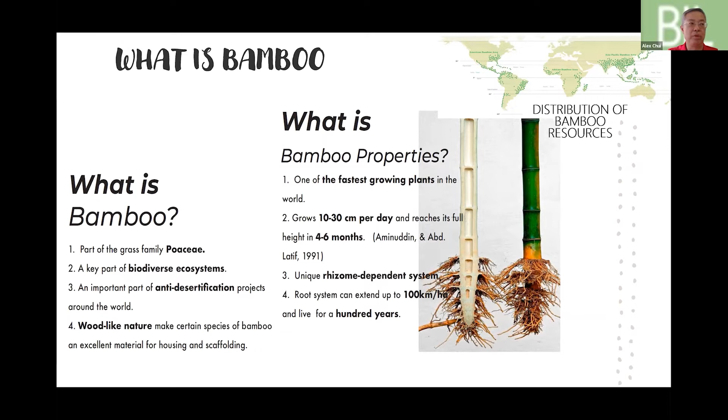Now, what are the benefits of bamboo? There are many benefits, but I think in today's modern world, one of the most important benefits of bamboo is ecological benefit. Growing bamboo doesn't require any intensive management and irrigation. Bamboo forests can release 35% more oxygen and absorb up to 5 times more carbon dioxide than trees. So naturally it's a very important element in the global carbon sink and climate balance.

One thing I have to point out is bamboo has a very strong and robust root system, and it will survive after harvest and grow afterwards. So there's no risk of soil erosion or deforestation in bamboo harvest.

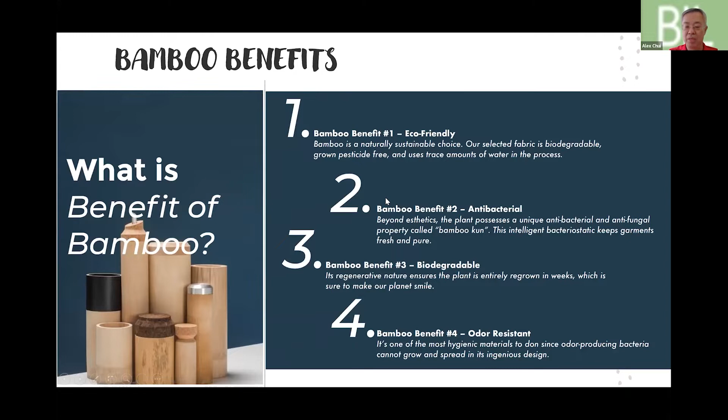Bamboo has been used in construction for a long time. Evidence suggests that bamboo construction first appeared in China about 4,000 years ago. Bamboo has very good tensile strength in the long direction. It has very unique characteristics - you can create very beautiful, unique architecture from natural bamboo poles.

But certainly it also has its limitations. It's difficult to codify natural material, which limits its application in industrial use. Also, the round shape of the bamboo pole imposes certain limitations on the architectural design that we can explore with bamboo poles.

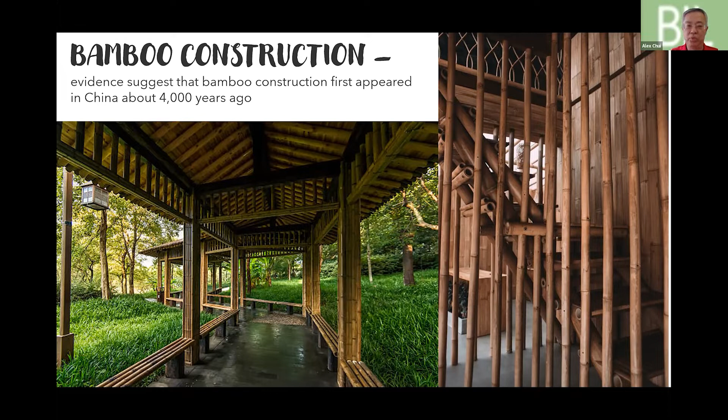In the past 3 decades, we started to have industrial products in bamboo, which we call engineered bamboo. The manufacturing process is quite simple: harvest the bamboo, cut it into individual bamboo slats, treat it for future use, and then form the bamboo into individual components.

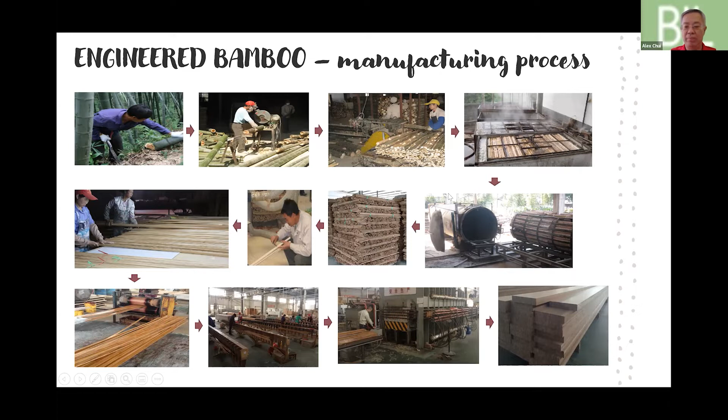When we look at the bottom right corner of the slide, which shows the basic components of all the engineering products that we'll see nowadays. Commonly there are two types of engineering bamboo: solid bamboo, a laminated product formed by individual slats glued together, and strand woven bamboo, which is crushed into bamboo fiber, then we apply quite a lot of glue and heat press it together.

Solid bamboo, when you look at it, is much greener, but in terms of strength it is weaker than strand woven. At the same time it's more flexible, and can mold and bend into a lot of different shapes and profiles. So in building applications, solid bamboo is more popular, but strand woven bamboo, when applied as a floor or decking in high traffic situations, is very hard and very robust.

If you compare engineering bamboo with wood, it's harder, it's stronger, and we try to create special design features using either wood or bamboo. Engineering bamboo can lead to much less wastage, as we can mold and bend bamboo into a lot of different shapes. Now, I said bamboo can be flexible and agile for architectural design. So what can it achieve?

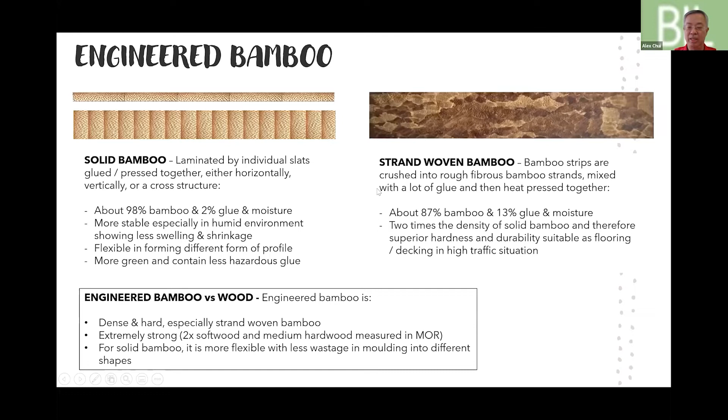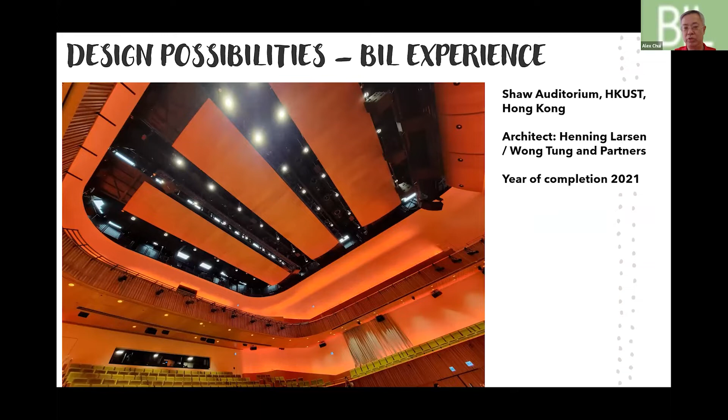Seeing is believing. Now I'm going to share some of the projects that we have done in the past. This is the Shaw Auditorium. I believe some of you guys have been to the auditorium in the AIA building tour in June.

The second one is the M+ Museum. We are doing all the mullions, ceilings, and walls.

And this is the Kowloon East Regional Police Headquarters in Kai Tak. One of the standout features in this project is the architectural fin in the ground floor lobby. It stands at 8.5 meters long without any visible joint in between. So it's a great piece of work that I think you guys can look at in the future.

And this is the Double Cove shopping center in Ma On Shan, Sha Tin. This is the only retail project in Hong Kong that has used bamboo on such an extensive scale. Year of completion is quite a long time ago, it's 2013.

Now I will turn to some outdoor experience that we have in China. The Chinese government is actively promoting bamboo, and they're more open to trying to apply bamboo in different sorts of applications, including structural bamboo. These two are not structural bamboo, but later I can show you pictures of our structural bamboo experience in China. These are two bamboo trellises in the tourist park in Chengdu.

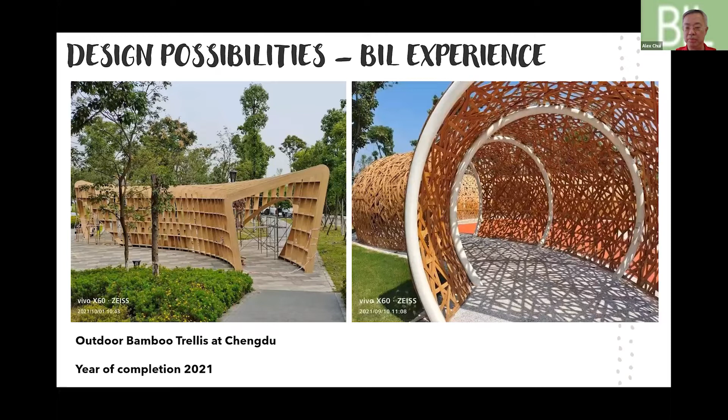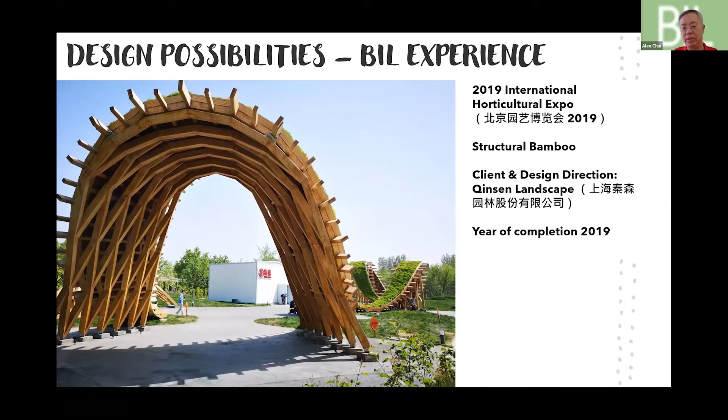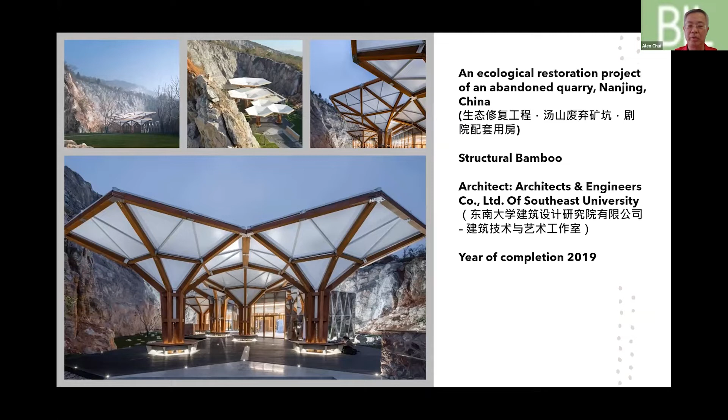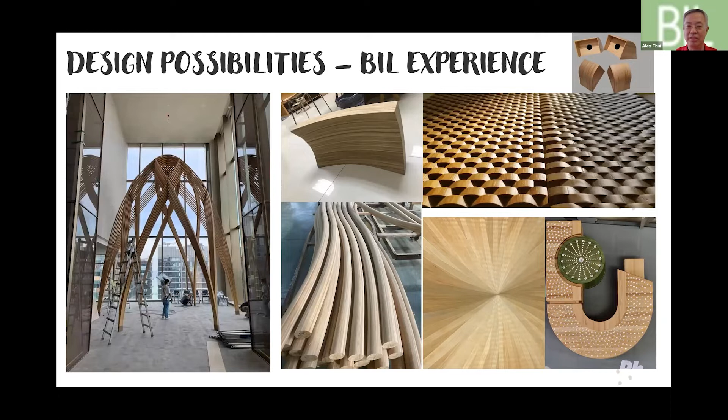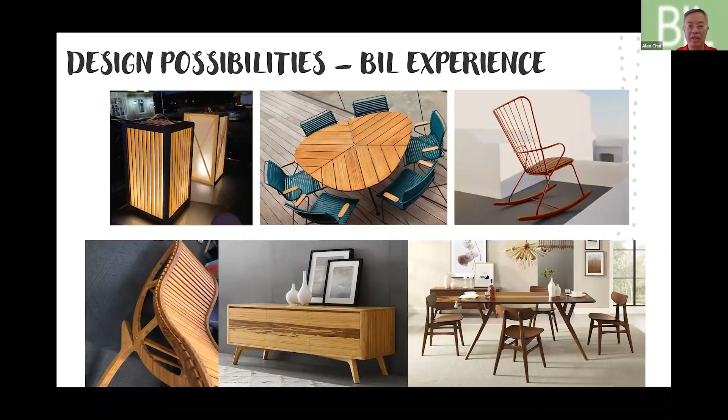Now, about bamboo promotion, the global promotion of bamboo: INBAR is an international intergovernmental agency formed under the UN Charter to promote bamboo. Besides green, I have to point out that bamboo economy is actually a social initiative. Bamboo and rattan grow locally in some of the most backward communities in the tropical and subtropical regions.

Since its founding in 1997, INBAR has been promoting the bamboo and rattan business in this region, and has successfully created jobs for about 250,000 people. So it's an amazing job done by them. And it's the same case actually in China.

Bamboo economy has been identified in China as one of the key initiatives to promote employment opportunities and income to local peasants. Beijing has set out a very ambitious goal: to use bamboo economy to alleviate up to or above 1 million people out from poverty. Where our factory is, in Jiangxi province, 150,000 jobs have been created in the past 10 or 15 years.

So bamboo, I see, is a green and social initiative that's important, one that I think we should all look at. And INBAR is also working closely with ISO to try to develop new standards to enable the application of bamboo on a bigger scale in different parts of the world.

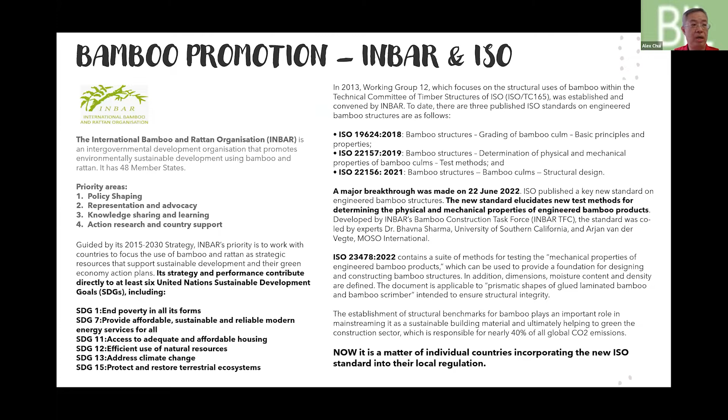Now, if you look at the physical strength between bamboo and wood, what we can achieve with laminated wood, we can actually achieve the same with laminated bamboo. The reason why we don't have bamboo buildings like this is purely regulatory.

Now, if you look at the ecological benefit of this building, based on the information released by the architects, this building alone - the saving in greenhouse gas is equivalent to removing 511 cars off the road in one year. So it's a pretty high, significant impact on the environment.

And INBAR and ISO are championing, trying to promote structural bamboo. I think one of the reasons is if we can create more buildings in bamboo, it can lead to a more significant carbon sink within all these buildings.

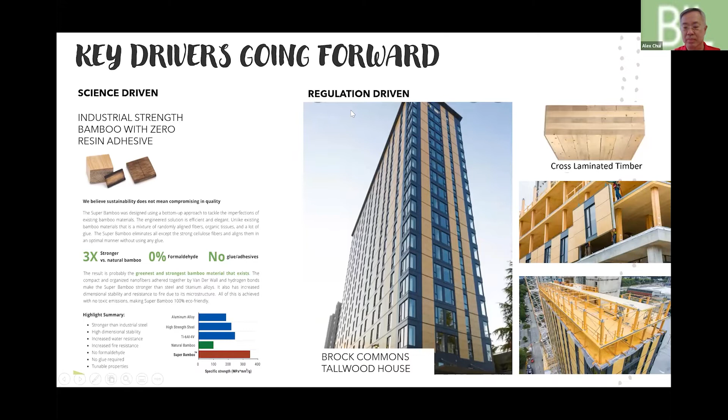So I think that's the end for my part. First, I will pass it to Dr. Dong.

Thank you, Alex. Before Dr. Dong starts, let me have a brief introduction about him. Dr. Dong is an environmental engineer, currently assistant professor at City University of Hong Kong. His interest is in life cycle assessments, carbon footprints, circular economy, and its application for urban sustainability. His research has been published widely, with over 120 publications. So let me pass that to Dr. Dong.

Okay, thanks for the introduction, Jackie, and it's my pleasure to join this great event today. I will share my PowerPoint now - okay, so I think you can see my PowerPoint and my voice is clear enough, right? Okay, thank you so much. I will discuss how we can assess the environmental impacts for bamboo products.

I will mainly introduce how we can apply an approach like life cycle assessment to calculate the whole life carbon emission, the embodied carbon emission in bamboo, to highlight its contribution to future carbon mitigation in our building sectors.

So here I want to highlight two big pictures from the energy and the material side. This is the total picture showing Hong Kong's condition on carbon emission. Here we can see the total carbon footprint in Hong Kong, and we can see the building sector actually accounts for most of the carbon emission. So it's significant for the building sector to think about how we can promote better ways to save energy and reduce embodied carbon emission to realize Hong Kong's target on carbon neutrality in the near future.

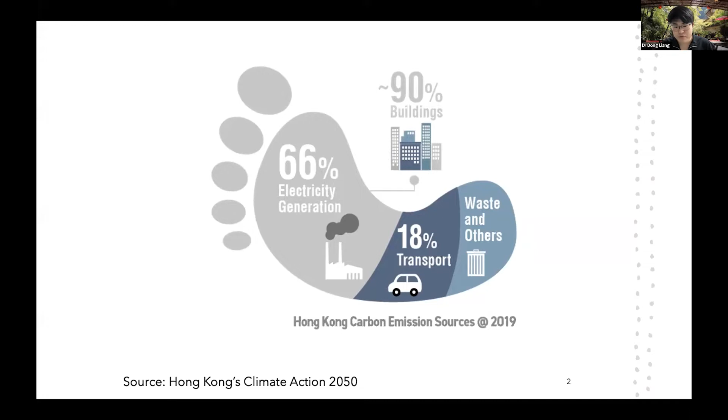And we also know that to produce these kinds of materials, we also have to consume a lot of energy, because the process of producing the materials is also very energy intensive. So how we can reduce carbon emission from the material side is also maybe some new attention we should pay in the near future to reduce the total carbon emission embodied in the building sector. So this is also a hotspot within academia recently.

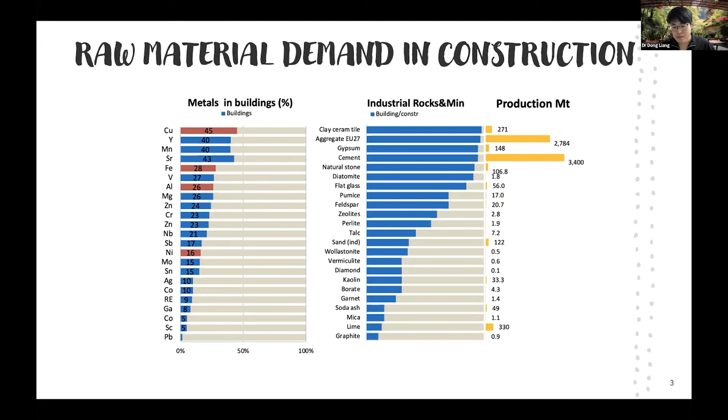We also have the demolition stage and how we can manage waste recycling for building materials. If we put carbon emission into the different life cycle stages, we can see there's much higher potential to reduce carbon emission. Now we pay much attention to the in-use stage, but it's also time to pay more attention to raw materials—how we can reduce carbon emission by using more renewable materials, which is a very important way to reduce total emissions in the building sector.

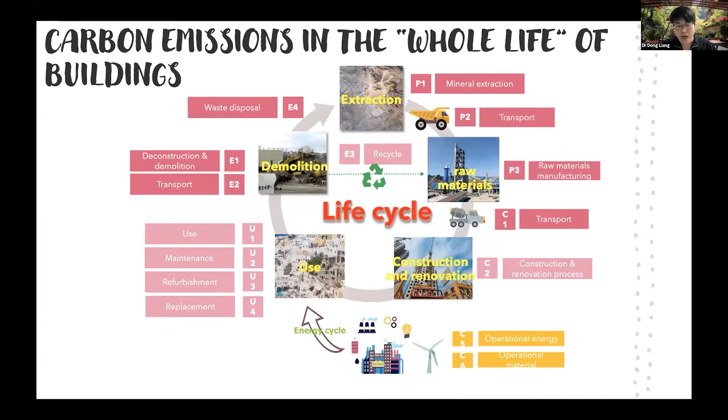So here we can see the benefit of renewable energy and also renewable materials.

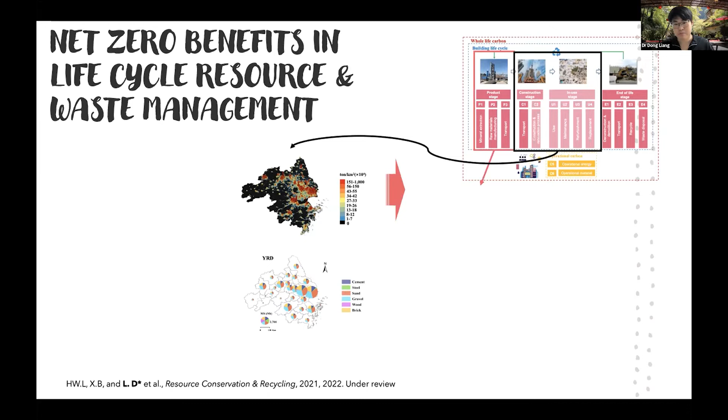Here is a case study we conducted in the Yangtze River Delta in China. We accounted for building material consumption across 36 cities in the Yangtze River Delta, like Shanghai, Nanjing, and Hangzhou. Apart from the bulk material amount consumed in all the buildings there, there's also a significant number to highlight regarding embodied carbon emission.

For example, the carbon emission from producing cement, steel, sand, and gravel. So if we pay much more attention to the material side of the life cycle in the building sector, it can offer a second round of space to realize carbon neutral scenarios in the near future, for example for Hong Kong and globally.

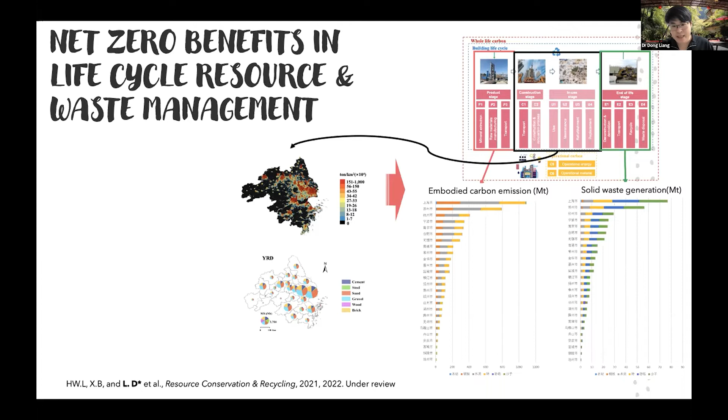Based on this idea, we can think about what kind of materials will be more beneficial to our environment and can help reduce carbon emissions. We have the idea to utilize more renewable resources because they can generate carbon benefits from the embodied carbon side, reducing the life cycle carbon emission for the building sector. If we apply more renewable materials, not just cement or steel, we can contribute more to carbon mitigation in the building sector.

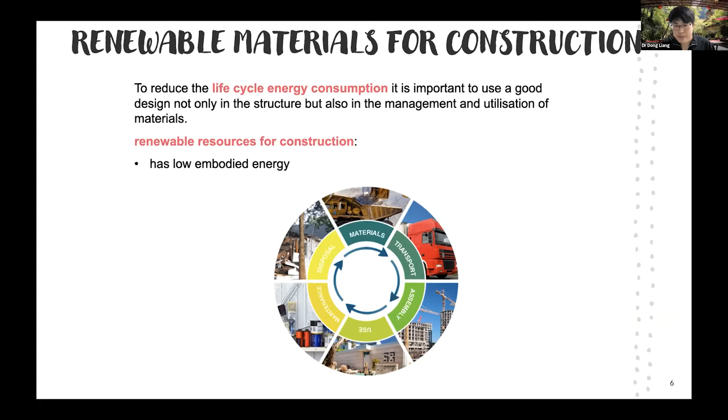This is the big picture and the ideas for this project. Based on this idea, we assess the life cycle carbon emission, also called embodied carbon emission, for engineered bamboo products.

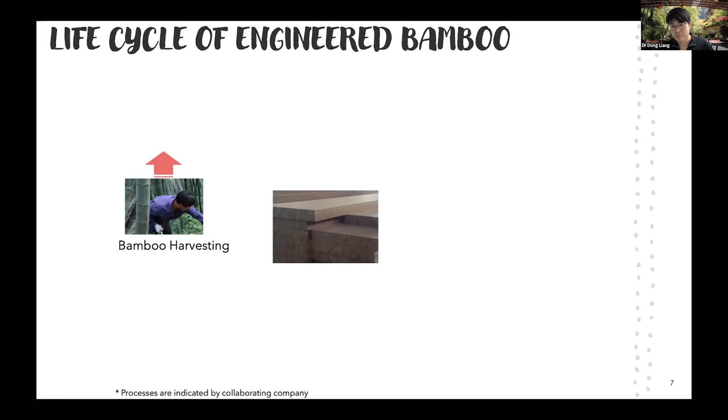Here is the very basic process to show the bamboo. We know this is the final engineered bamboo product, and to produce it, many processes are integrated into the whole life cycle. We have bamboo harvesting and transportation to the plant, then processing, like sawing of the raw materials, splitting of the bamboo culms, and rough shaving.

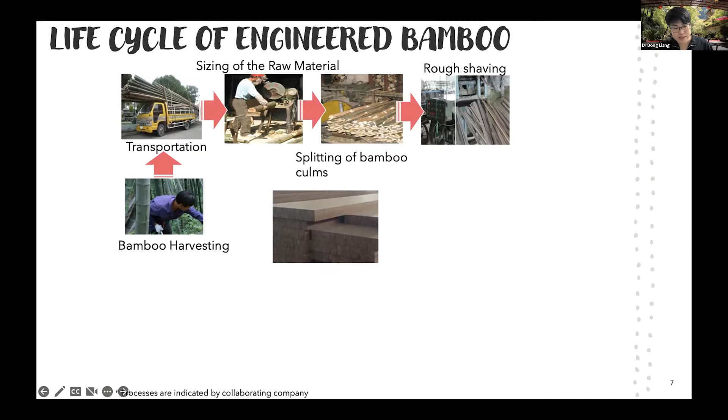Then some different processes follow—for example, fungal treatment, drying and moisture content control, precise shaving, color sorting, gluing, and assembly—and finally they become the final product which is shipped to Hong Kong.

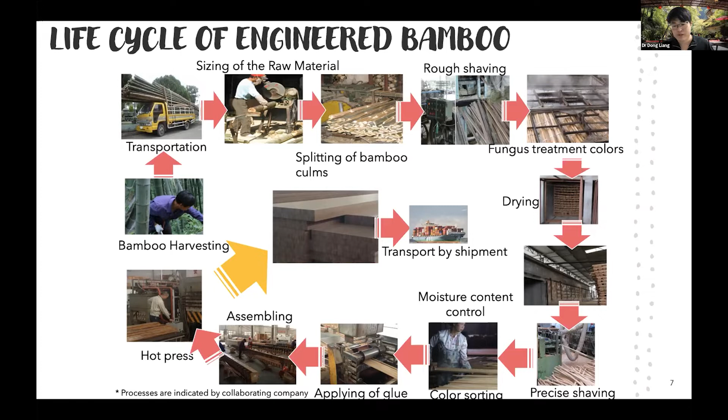We know transportation also consumes energy and material. So if we account for the total carbon emission for each process, we can show how much embodied carbon emission there is for the bamboo. This is the bigger picture of the bamboo manufacturing process.

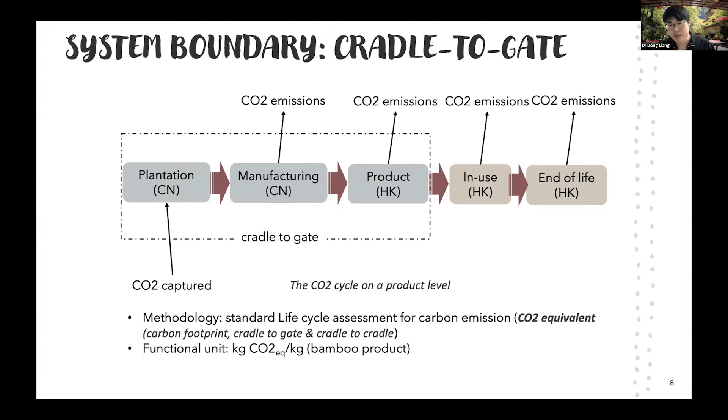We also applied life cycle thinking and assessment to account for the carbon emission embodied in the bamboo—a typical, standard life cycle assessment approach. We account from the plantation to the manufacturing to the products, and we also consider end-of-life scenarios to further account for the total life cycle carbon emission. We transform the data into per-unit values, like kilogram CO2 emission per kilogram of bamboo product. That is the methodology we applied to account for the whole life carbon emission.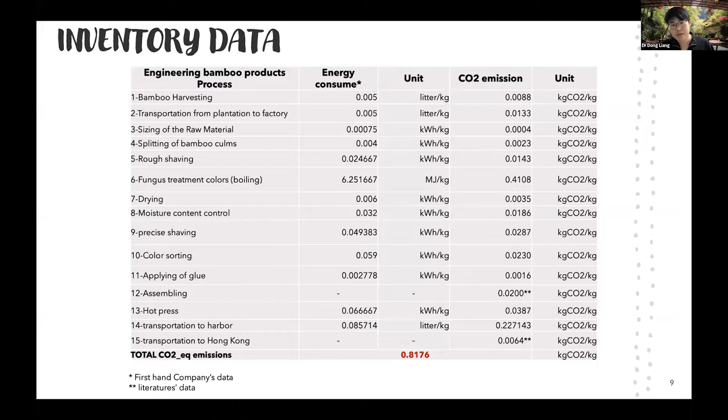But it is only from the cradle to gate. We also need to know bamboo in nature is a plant. So plant also, due to the photosynthesis effect, can absorb carbon emission in the process of growth. So bamboo also has the benefit of carbon sequestration. We will also think about this kind of benefit and results.

So this figure highlights the process-based carbon emission for the bamboo products, and we can see some processes can be potential to be future improved. For example, the much higher emission will come from the transportation, for example, from the mainland to Hong Kong due to the shipment.

And also some higher carbon emission is observed and accounted for the fungal treatment, and also something like the process shaving and also the hot press. They will use the steam and have very high internal energy consumption for this process.

So if we can use the data, we can also enlighten how we can further improve the different processes to try to reduce the process-based carbon emission to optimize the carbon emission for the bamboo product. This is also some figure we can see the numbers on this figure. This is the detailed carbon emission for each process on the bamboo.

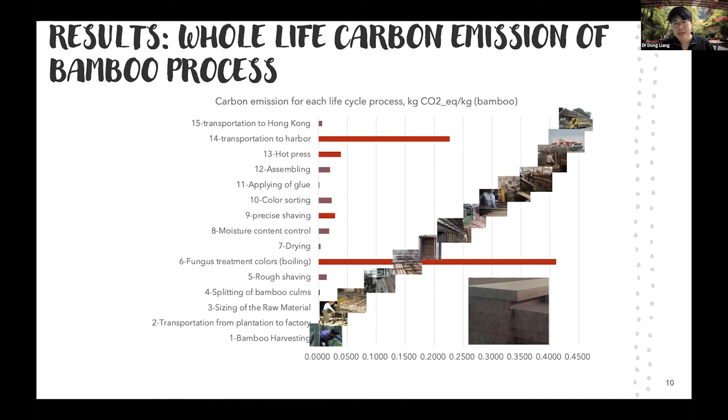And also, as I mentioned, bamboo is biomass and also a plant, so it has the benefit of carbon sequestration. So if we think about the carbon absorbed in the process of growth of the bamboo, we can further reduce the total life cycle carbon emissions.

For example, the data from the paper shows the bamboo growth in mainland China, like Fujian and Jiangsu province, the carbon sequestration benefit will be about minus 0.607 kilogram per kilogram bamboo.

And also the number will also change due to the end of life. For example, I applied the scenarios from European Union. 90% of the bamboo waste goes to power generation and only 10% will be landfilled. The benefit on the end of life will also further reduce the carbon emission by 0.7 kilograms. So that means we can also reduce the carbon emission by burning the bamboo to reduce fossil fuel consumption.

For power generation. So if we add the benefit on the carbon sequestration and also the benefit on the power generation from the bamboo waste, the total life cycle carbon emission for bamboo will be further reduced to, we can see the number is minus about 0.493 kilogram CO2 emission. That means bamboo is not only carbon neutral, but also actually tends to be carbon minus.

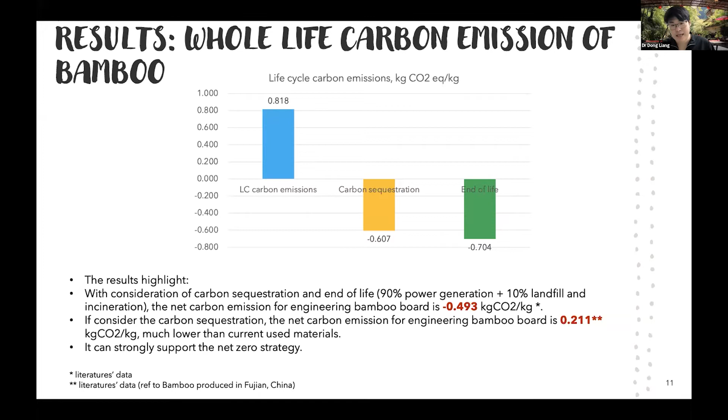So if we can apply more bamboo into our buildings due to its nature as carbon minus, we can contribute to net zero buildings in the near future. So that is something we can highlight based on the assessment on the life cycle carbon emission in bamboo.

And we further compare the bamboo carbon emission with other materials in buildings. For example, the number we can see here actually is still very high and intensive, and of course the high number on the carbon emission is about 2.38 kilogram CO2 emission per steel.

And also if we look into some other material, for example, that can potentially be substituted by bamboo, we can see wood is about 0.2 kilogram CO2 emission per kilogram of wood. So it's very close to bamboo without recycling.

So actually here we can see, of course, different materials have different functions. We can't use bamboo for all purposes, but if we can think about and utilize our inspiration, how we can improve the design, interiors or outside design on the buildings, maybe in the future there should be more potential to reduce the whole life carbon emission for our buildings by applying bamboo as a replacement, for example, some furniture or some decoration or some floor.

So that is the basic data we can see, and also we can use the data to support future policy making to expand our usage and application for bamboo-based products.

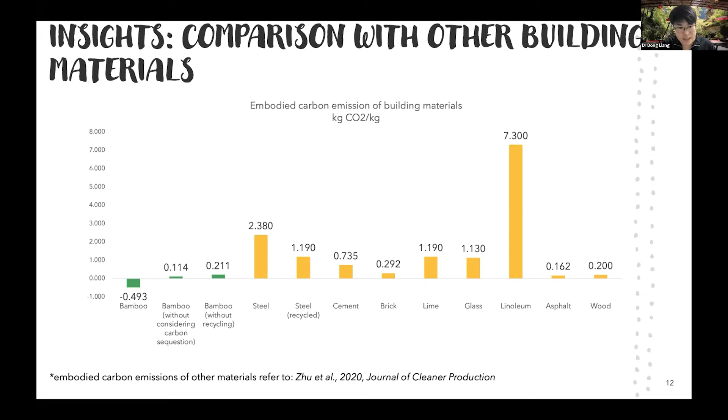Okay, so here actually based on the data, we have some general conclusions. We can see the industrial bamboo has significant potential to reduce the current whole life carbon emission for our buildings because in nature it is a renewable material. That means the benefit on the mitigation for whole life and life cycle carbon emission.

Therefore, bamboo could be substituted based on feasibility. So we need to open up imagination, and we need inspiration from designers and architects.

Some specific processes of bamboo also show relatively higher carbon emission, for example transportation, hot press, and fungus treatment. So we can think about future potential improvements, such as how we can utilize more renewable energy, promote hydrogen for shipment, achieve heat recovery at the plant, and use more efficient steam utilization.

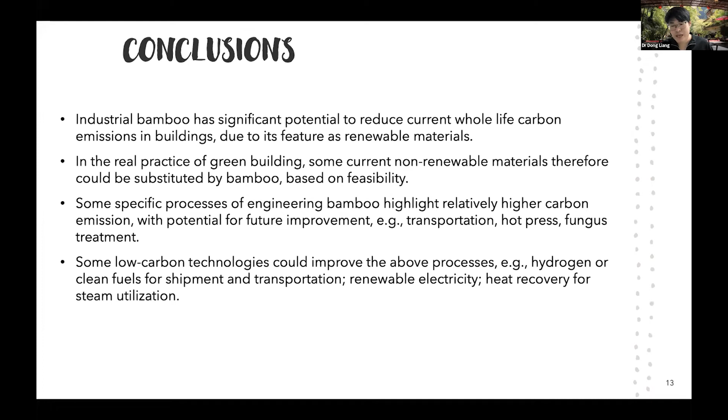We also think about future concerns. We started today by showing basically the CO2 emission, but in the future, based on life cycle assessment, we also want to assess other impacts and health impacts, for example air pollution. If we reduce fossil fuel, we can also reduce air pollutants. This is very important. Also, how about water pollutants and the risk to ecological systems, and impacts on human health, for example life expectancy and so on.

We also tend to make detailed scenario assessments to explore how to improve with current technologies in engineered bamboo. For example, how we can apply cleaner fuels, how we can apply heat recovery, and how we can apply low impact glue in the process to reduce other environmental impacts.

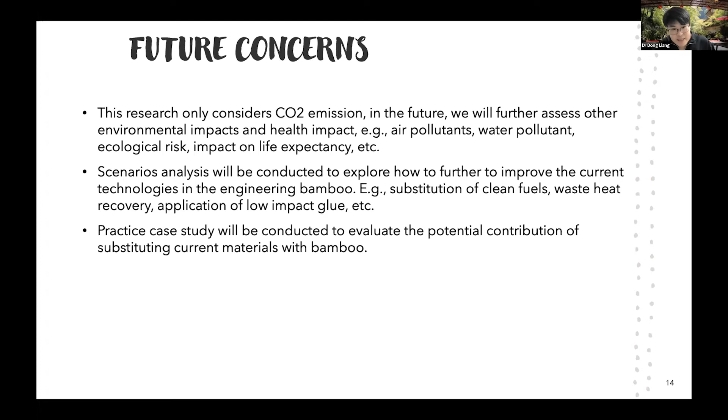Finally, I think a practical case study will be very important to realize our ideas in the real world. So we intend to utilize the unit value for bamboo to evaluate how a whole building can reduce carbon emissions if bamboo is used in proper places, for example furniture and decoration. This is our next plan, to show a real case highlighting how we can practice bamboo ideas in the real world to support carbon mitigation and neutrality scenarios in Hong Kong in the near future.

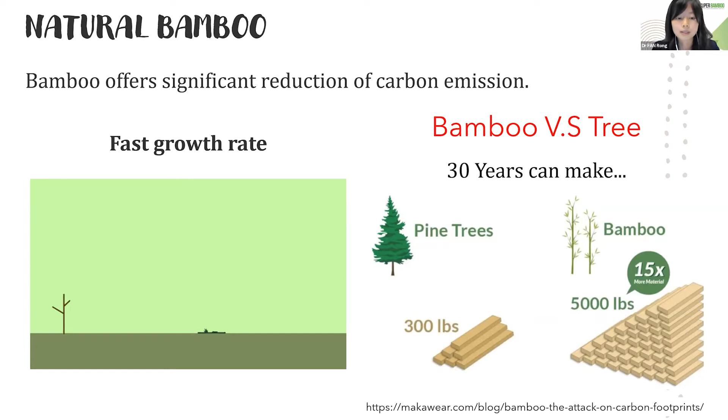From Dr. Dong's introduction we already know that bamboo could offer significant reduction of carbon emission. One more thing, mentioned by Alex at the beginning, is that bamboo is one of the fastest growing materials and one of the highest yielding natural cellular materials. It can reach maturity within months and ultimate mechanical properties within a few years. So when you plant a bamboo tree and also plant pine trees together and wait 30 years, you can produce roughly 300 pounds of pine trees, but you can have 5,000 pounds of bamboo, which means more than 15 times the amount of building material if you use bamboo. So bamboo has very good potential.

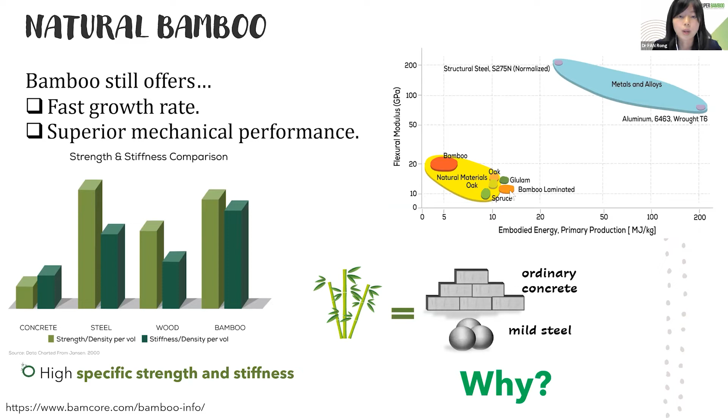So why does it have such a phenomenon? Why does it have such mechanical properties in terms of the things we're showing here? To answer that question, especially for material scientists, we usually find the answers through the microstructures.

When we talk about the microstructures or the whole structure of the bamboo, the first one is the regular bamboo structure that you already know. It contains the hollow culm and also the solid node.

But when we cut it off and look at the cross-section area, we find it is not uniform anymore. It contains, we could say, a monkey face, because it contains some dark parts and also some white parts.

When we zoom in again to the microstructure level, down to the nanostructure level, we can find each level contains different structures inside, such as when we go to nanostructures, it also contains thousands of microfibrils inside. So this means the total structure is the hierarchical structure of bamboo.

In today's topic, we will not include the nano part. We will focus more on the microstructure level, because sometimes we can see it just with our eyes, without needing any other tools.

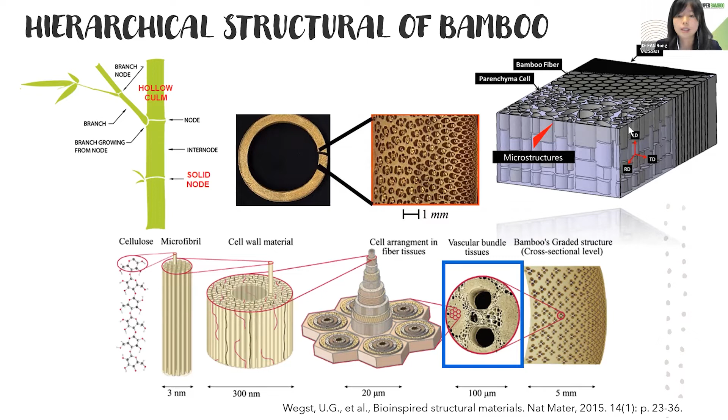We also drew a schematic picture here showing the typical structures, the microstructures inside the bamboo. This page will give you more information about it. So for the bamboo, it usually contains a hierarchical structure like this.

We show two different directions: this is the transverse direction, and this is the longitudinal direction. We can see the scale here is around 1 millimeter, visible by our eyes in this area, and here it's around 400 microns down to 20 microns.

From the large image to the smaller image, we can see it contains different microstructures inside. Taking this one as an example, the bamboo contains some vessels here.

Vessels transport water and nutrients, and they are all surrounded by fibers. In terms of volume fraction, the fibers and the cellular parenchyma cells, like this one - this is the parenchyma cell - form the majority of the bamboo culm.

So these two parts, the bamboo fibers and the parenchyma cells, contribute more in terms of the mechanical performance.

We can take Moso bamboo, the most popular bamboo, as an example. We can see it contains around 57% parenchyma cells and also around 37% bamboo fibers.

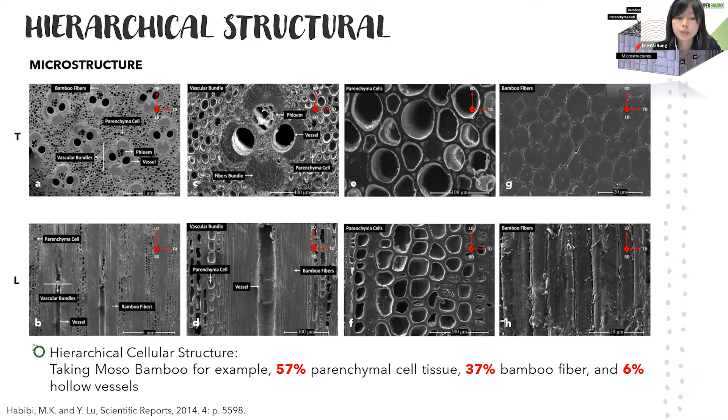Once we know the microstructures, we will do some mechanical testing to test the mechanical behavior of it. Today I will show three typical examples of mechanical testing.

The first one is tensile and compression. We will pick up the bamboo from the bamboo culm along the transverse direction, and then do the tensile test and the compression test.

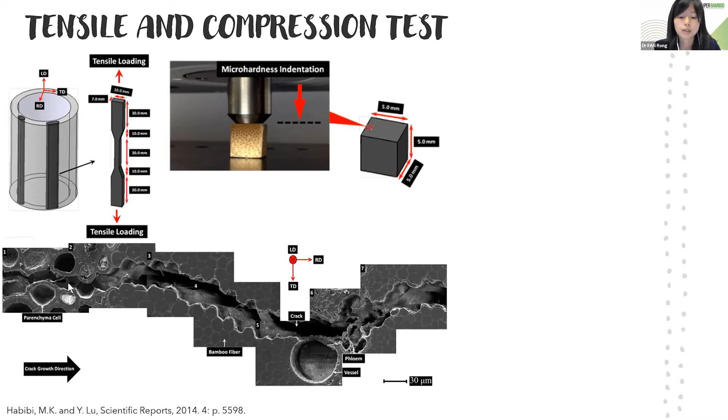Today I will show some microstructures of it. Once the initial crack reaches the critical condition for further crack growth, it will propagate along the parenchyma cell boundaries - we can see here, this is the parenchyma cell.

It will usually crack along the boundaries until it reaches the fibers. But we can also see it will crack through the interfacial surface of the bamboo fiber, like here, until it reaches the vessels, because the vessel is more like a hollow. This means the material here will be blocked and then find another way to continue cracking.

So the crack is important, because especially for construction, crack is not good. We want to prevent the crack - just like if we have a glass, we know glass is very brittle. If you have a very small crack, the glass will be fragile.

But for bamboo, because it has so many interlocks, the microstructure of bamboo will prevent crack propagation and give you more toughness.

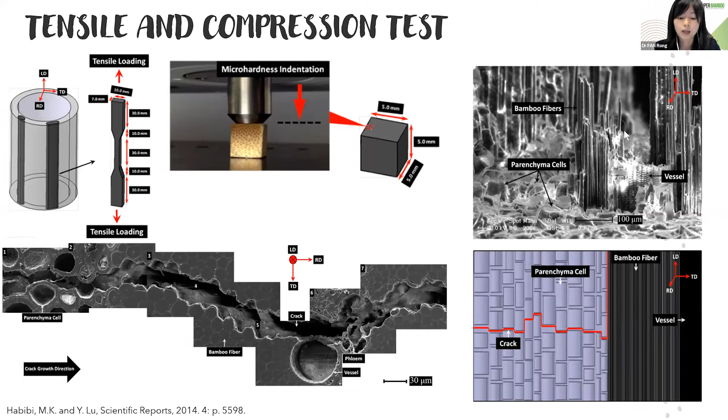This is a picture showing the fracture surface of tensile bamboo. We can see that the bamboo fibers were pulled out. This is the most prominent feature in the tensile fracture surface, which could simply be created to exhibit crack growth along the fibrous interfacial areas in both radial and longitudinal directions.

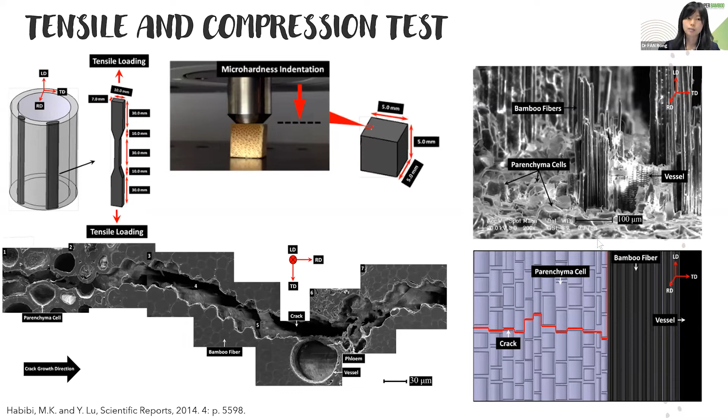We also did some bending tests, because we know that fibers and parenchyma cells have a very important role in mechanical performance. So we chose different samples containing different parts: parenchyma cells, the white ones, and fibers, the black ones, to do mechanical testing and check how they affect the total mechanical behavior.

When we compare model A, which has more fibers on the top area, and model B, which has less fibers on the top area, we do a 3-point bending test. The bottom part is fixed, and the loading goes through the top part in the middle of the sample.

This is the typical mechanical testing process for any material. Model B is the test loading on the lower fiber, compared to model A. This is the stress-strain curve, where stress is related to the load and strain is related to the displacement.

We can see that the stress-strain curve in the first stage is not linear. It's a nonlinear deformation here, especially before the fracture point. This is associated with the squeezing of the parenchyma cells, because we already know the parenchyma cells are more like a capsule shape. This area contains more space, so it gives more space for compression, compared to model A, which does not have this phenomenon.

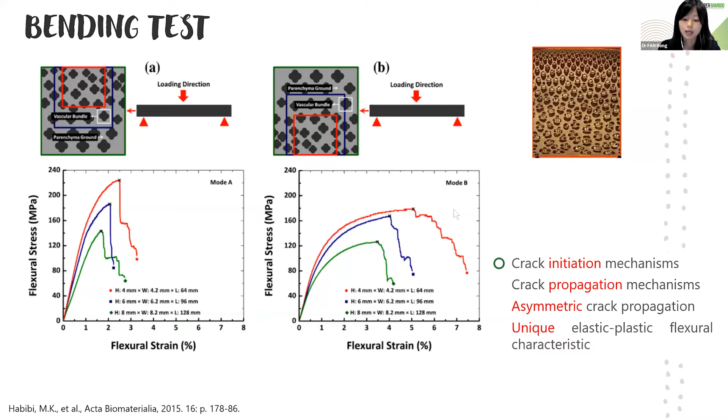For model B, the fracture mode is more like fibers pulling out, named as delamination. But both models show some squeezing of the parenchyma cells on the top side, which is quite important for such a material, giving more fracture strength, meaning it can deform more. That is the typical fracture mechanism of natural bamboo.

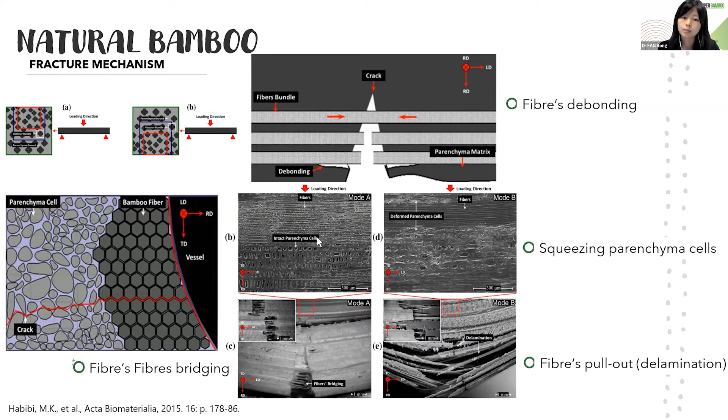We already know that bamboo fibers and parenchyma cells are both very important, but how do they affect the total structure, or how can we get them and test it? So we found another way to isolate all of the parenchyma cells and fibers.

There are two different magnifications. This one, the scale bar is around 100 microns, more like the dimension of your hair. This is the fibers. We can say the fiber is more like solid, but the parenchyma cells are more like a capsule shape, which gives larger space for compression, while the fibers provide more strength.

Some researchers also studied the tensile strength of these fibers and found that the maximum tensile strength can reach around 2.2 gigapascals, which is quite high. But compared to the known tensile strength of bamboo, around 100 megapascals, this means there is a larger space for us to improve natural bamboo.

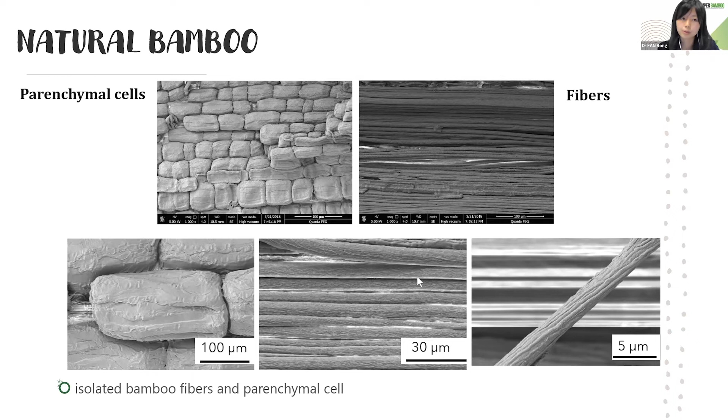Other than that, I want to show the current bamboo materials. Alex already showed some results on this part, so I will just skip it.

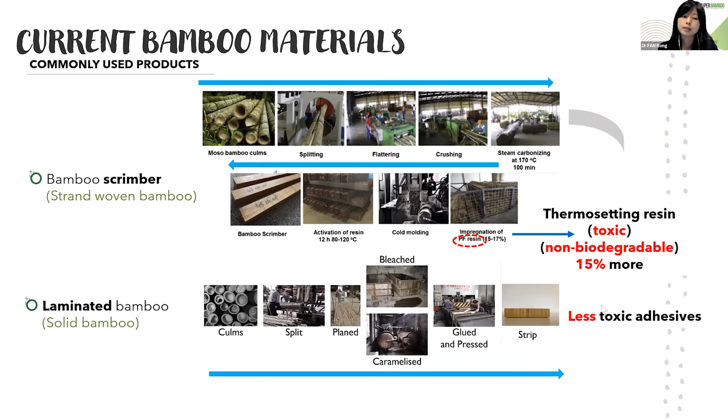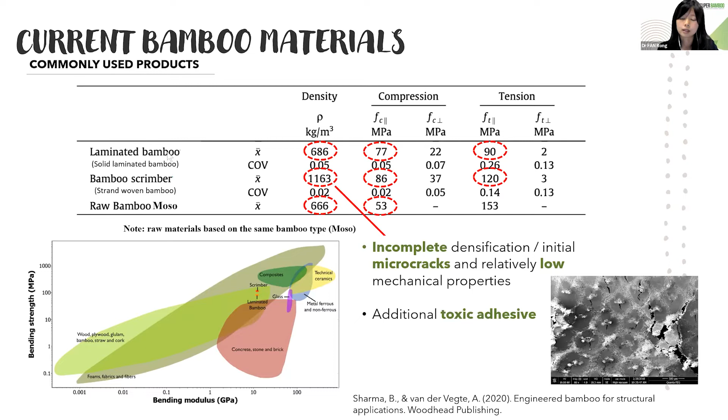My point is that current materials contain a lot of toxic adhesive, and the material inside has some initial cracks, which is not good for mechanical properties. That is why when we check the compression and tensile strength of existing bamboo products, it is not good. So our process uses a very simple two-step process to get the super bamboo.

The first part is that we'll do the chemical treatment to remove the lignin and the hemicellulose inside, to make sure that the bamboo fibers and the parenchyma cells introduced today can be easily moved, which means all of them can be fully compressed. That is the most important part we need to do.

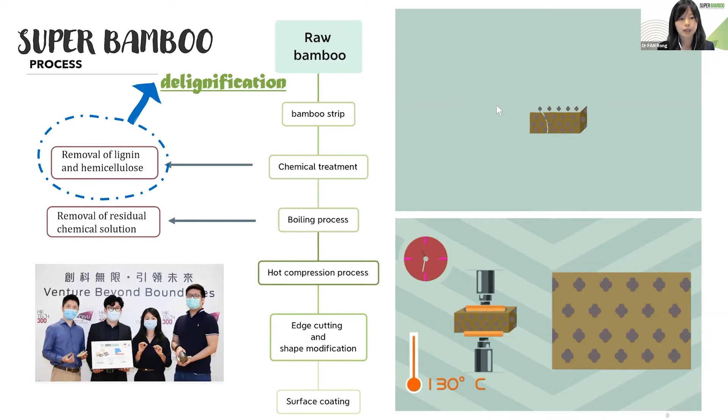Another thing is that we'll just use the bamboo material itself to glue them together, which means we didn't use any additional glue, especially any toxic glue, for our super bamboo samples.

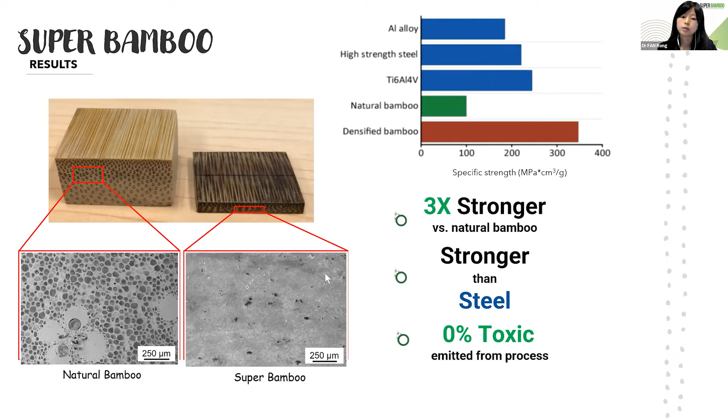So this shows you the example of the microstructure. We can see that this one contains a lot of hollow space, but this one is fully densified, which is why this material can give you more than 3 times the strength of natural bamboo. And also this is 100% green materials.

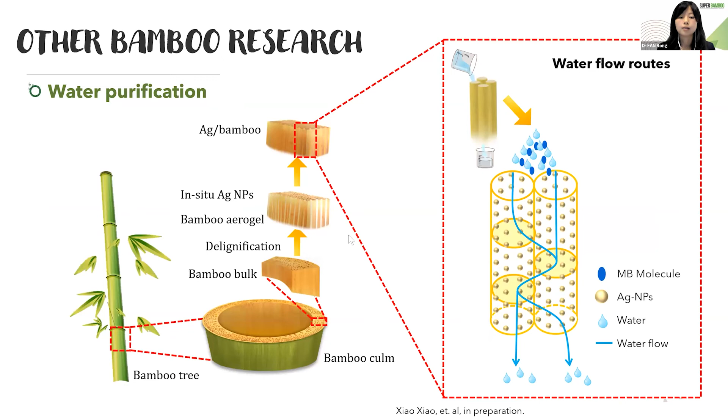This is from 2 other researchers. I will just skip it because my time is up. And yeah, I think that is all I want to share today. Thank you for listening.

Thank you, Dr. Kong, for extremely vigorous research on bamboo down to its microscopic level. You actually reminded us that bamboo, although a very sustainable material, if we can eliminate glue, would be a breakthrough and make it even more sustainable.

And so I understand you and Mr. Ong founded a startup, Super Bamboo, basically bringing the research out of the lab into application level, so that for us architects can maybe one day see this product in the market.

So next we have Mr. Ong. He's one of the co-founders of startup Super Bamboo, also a mechanical engineer, and one of the achievements was last year: you started the startup Super Bamboo and raised over 2 million Hong Kong dollars to further the research on bamboo material.

So I will pass the floor to Mr. Ong. Okay, thanks Jackie again for your introduction.

Yeah, hi everyone, I'm Andy. It's my pleasure to be here as the last speaker for the last section of this webinar. After my part, I will pass the mic back to Alex for a quick recap, followed by a Q&A session. But now, what I would like to share in my short time is really how there's an opportunity to

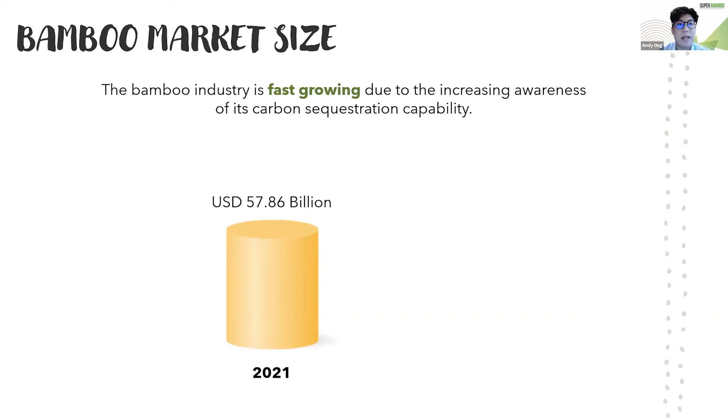Now to start, earlier Alex showed everyone some pictures of wonderful projects made out of bamboo. But let's take a step back and glance at the global market size of the bamboo industry. So in 2021, the global market value of bamboo stood at around 58 billion US dollars, and it is forecasted to reach around 83 billion US dollars by 2028.

Now, of course, besides engineered bamboo, this number covers other types of bamboo products as well. But the takeaway is that there's already a sizable industry for bamboo, and we expect it to grow even faster following the exponentially increasing investment put into carbon reduction solutions globally.

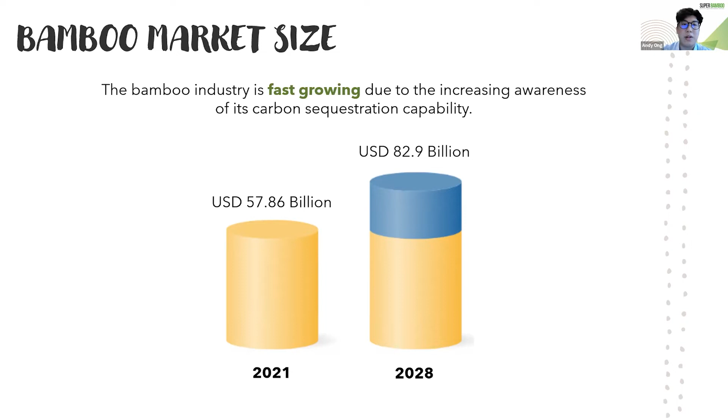So just a bit of history. Professor Lu Yang got interested in bamboo when he was a postdoc back at MIT around 10 years ago. In research, our modus operandi is always to study and understand the underlying mechanisms, and then with that, we try to improve or invent something new. And that is exactly what happened here.

Dr. Fan has extensively shown you how we try to study the microstructure of bamboo, which allows us to do something different. Usually in the past, the manufacturing of bamboo was done at high scale where people do trial and error. But for us, we try to rethink how to improve the material with a bottom-up philosophy, first understanding how the material works itself, which eventually led to super bamboo being invented.

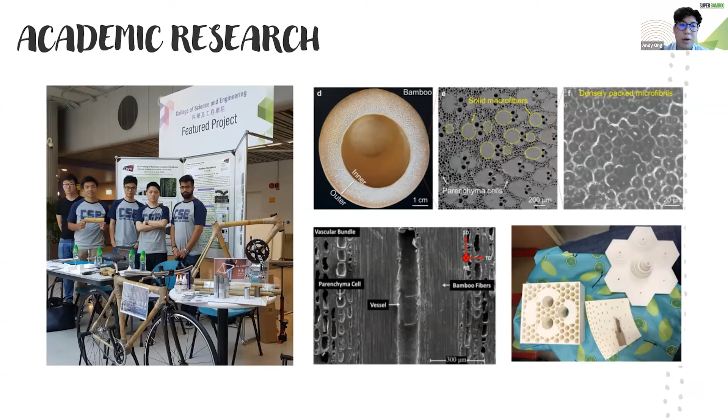With that successful proof of concept, the next step is to commercialize the technology and try to bring it to real life applications in the market. In Hong Kong, we have amazing support, which makes it possible to spin off research into a company.

We first gain support and funding from the university level, where they support startups. We also get support from startup incubators by the Hong Kong government, such as Hong Kong Science Park. Once our model has matured more, we'll engage with Hong Kong venture capital, which currently is very interested in investing their money and capital into projects where we can reduce carbon for the world.

In Hong Kong, we're also fortunate where, besides the main path of funding, a lot of other organizations, whether in terms of research funding matching or startup councils, support us in terms of giving advice on how to scale up, and other organizations help us solve problems in terms of media coverage, administrative problems, and so on. So the support is really there.

In just the span of 1 year, we were very fortunate to gain some notable awards for our technology, including the Gold Award in the International Inventions Geneva last year, and also the Merit Award in the Mechanical Innovation Award just a few months ago.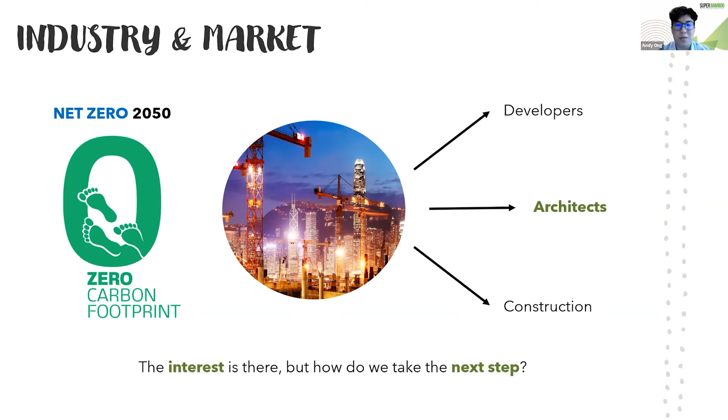Definitely a good first step today with the webinar for us to actually learn about the material. We have seen the material and the product of bamboo being used in architecture. And so I guess we can open, we can answer some questions from the audience.

Before that, maybe I can start first with my question. So my first question is for Alex. From your presentation, I learned that your company, Bamboo International, is not only a sustainable initiative, it's also a socioeconomic driver to create jobs and help end poverty in China potentially. Today you brought together scientists, manufacturers, and even architects. I can see your true passion for bamboo. So what inspired you to start Bamboo International? Did you see a lack of locally sustainable material in the market? And in terms of the future of bamboo, you see government policy as the key to transform this material, from what I understand. Can you elaborate on that?

Thank you, Jackie. It's a good question. I think you probably have answered some of the questions that you just asked. Now, I personally retired in 2017. When I retired, I did not foresee participating in the bamboo business. I was introduced to bamboo by my ex-colleague and my mentor. And I think the market is not short of sustainable green material.

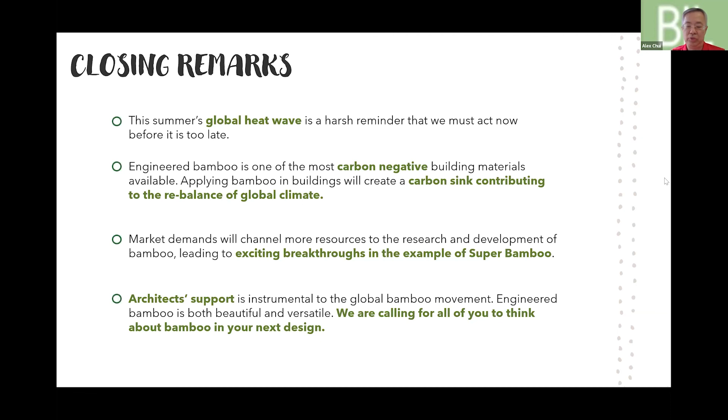Now, at the end, as we mentioned in different locations, we really need your support. I think architect support is instrumental to the global bamboo movement. So we would really want to call upon you to think about bamboo in your next design, to join our journey to promote the bamboo economy. I think that's it from me.